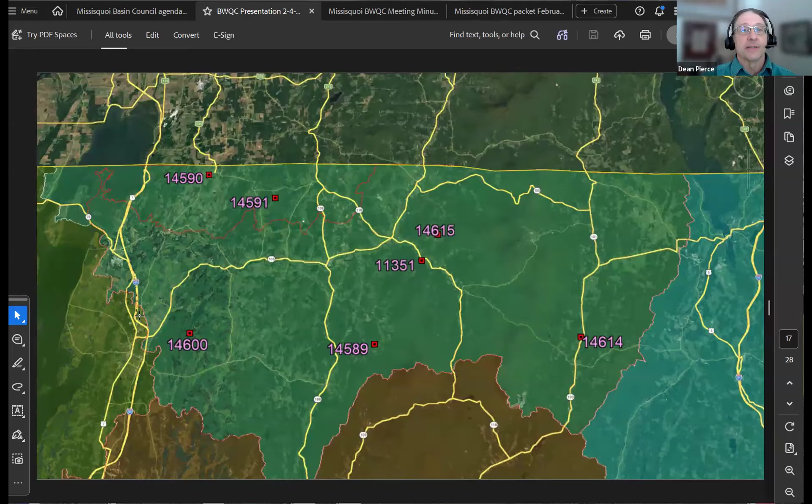You've had the packets for a week now, so you've hopefully had a chance to get some idea of what the projects are. They're in a distribution of towns across the watershed, 3 or more different applicants, including a first timer in the land trust.

And I wanted to just touch on the corrections, the corrected overview data, shown in this table. The numbers will be correct when we get to the individual applications, but apologies for giving you a table in a text document that had not carried over the correct numbers from the spreadsheet.

But there are a couple of implementation projects, 3 final design projects, and a preliminary design project, and then the forest roads are a design project - it's kind of a new category, so it's slightly different - with a range of phosphorus reductions from a couple kilograms to as many as about 50, which is an impressive number.

And in terms of cost effectiveness, again, a range from a pretty desirable cost estimate of about $4,400 per kilogram to about $45,000 per kilogram.

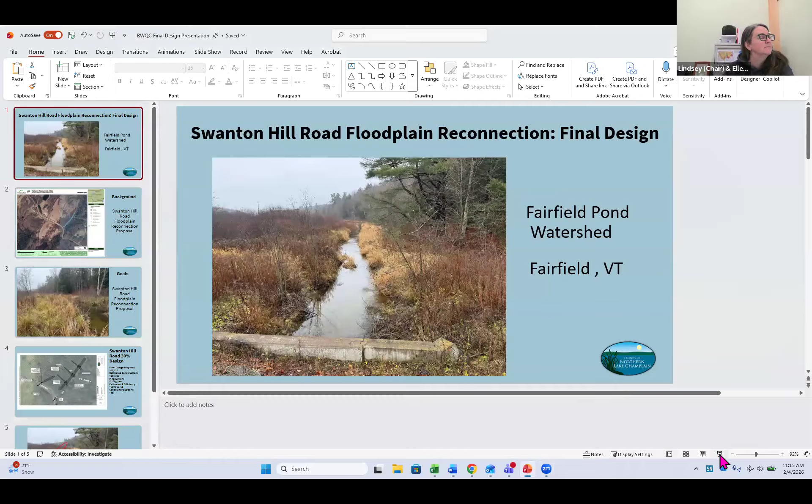So while Josh is doing that, the project name is Swanton Hill Road Floodplain Reconnection. It's a final design project. The numbers requested, as long as this is the correct table I'm looking at, it's $22,123 with an estimated P reduction of 6.18.

Thanks, Lindsay. Everybody seen this all right? Yeah, that's good. Great, cool. So this is a project that is located in the Fairfield Pond watershed, not in the town of Fairfield, but in the town of Swanton, so about just south of the lake.

Project map up here, give a little bit of background. So this project emerged out of our Fairfield Pond Lake Watershed Action Plan that was completed at the beginning of my tenure in about late 2024 or early 2025.

While the project really did give a strong suite of potential projects, that landowner outreach part for the specific 30% designs and beyond was variable, to say the least. I think I'm the 3rd or 4th project manager to have actually touched this project, and writing the final report at the end felt a little bit strange, but here we are.

I do want to highlight that we pursued some expedited project development funding from Dean. I know he'll ask me to speak on that later, but I do really want to speak to how beneficial it was to be able to develop this project a little bit more.

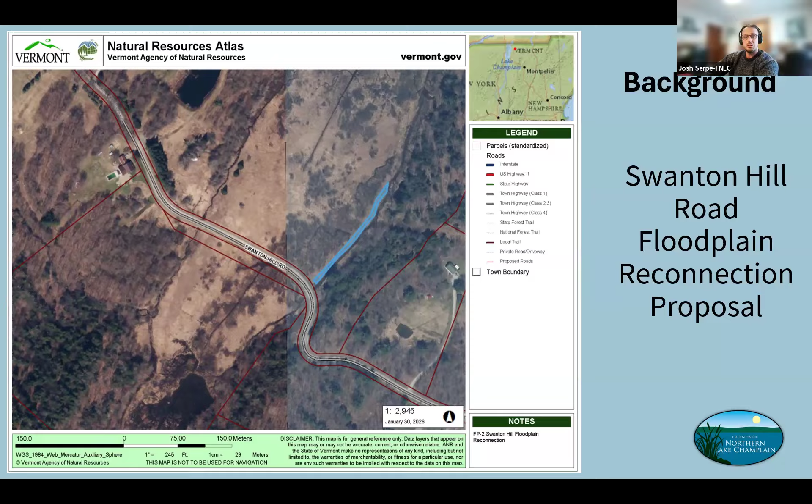Looking at this site, it was selected because it seems to be a historically straightened channel with a ditch that moves along the side. You can see on my map where I have it outlined in blue, probably an area that was formerly farmed, right off of a road on private land with a very supportive private landowner. The goals of this project were just starting to flesh out, but it's really just to take this straightened stream, remove some parts of the berm, and hopefully connect it back to its floodplain. Because of the easy access, I think it really presents an opportunity for a nice phosphorus reduction at a relatively low implementation cost.

So I'm just going to throw up the 30% design. Again, Fitzgerald Environmental was on the project for the LWAP, and we also contracted them to do some of the additional project development work. It was really fruitful to be able to bring them out on that initial site visit, meet with the landowner after they had already been on the project from 2023 to 2024.

We're proposing $22,000 for final design. Part of that is going to be for an archaeological review assessment, which I just heard back from VDHP yesterday, so that is going to be required. Looking like a phosphorus reduction of roughly 6.2 kilograms, estimated construction about $80,000. So a relatively efficient project.

I definitely want to highlight the landowner willingness in this project. It was great to be able to go to the Fairfield Pond Recreation Association and meet with the landowner. While she wasn't necessarily aware of the project, we didn't really want to dump that on her right at a meeting. She was aware of what the action plan was doing and aware that she could be a part of it. But we took a step back and also leveraged a tool being Lakewise, which she signed up for. That was another great opportunity to be able to get out there and meet with her. Not necessarily talk about the project, but sort of plant the seed of who we are, what we're doing, and what we're trying to achieve.

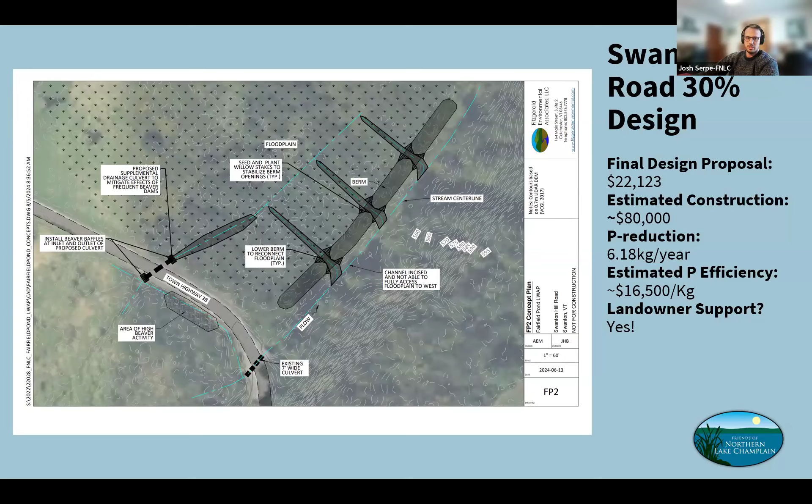It would probably trigger some wetlands permitting, but all in all, we anticipate this project having good access. We wouldn't need a permit for that part, just to really consider the cross culvert. So I'll leave it at that. Thanks, everyone.

Thanks, Josh. Anyone have questions about the project? Go ahead, Lauren.

Excuse me, I just want to flag that this seems like a great project. I just want to make sure - you kind of said you might want to do some more alternatives analysis on a couple different things, and the 22,000 just seems a little low if you also want to do alternative analysis. But if that's what Fitzgerald gave you, I trust that too.

Yeah, so I had a conversation with Joe. He said the first thing we would do is, we factored in that culvert for the design, but we would go initially and talk to the town of Swanton to see what their appetite would be for actually digging up the road.

Any other questions? If not, let's have a motion.

This is Lauren, I move to support this project with the funding amount requested for this phase. We have a motion from Lauren. Second from Ted. Okay, motion from Lauren, second from Ted.

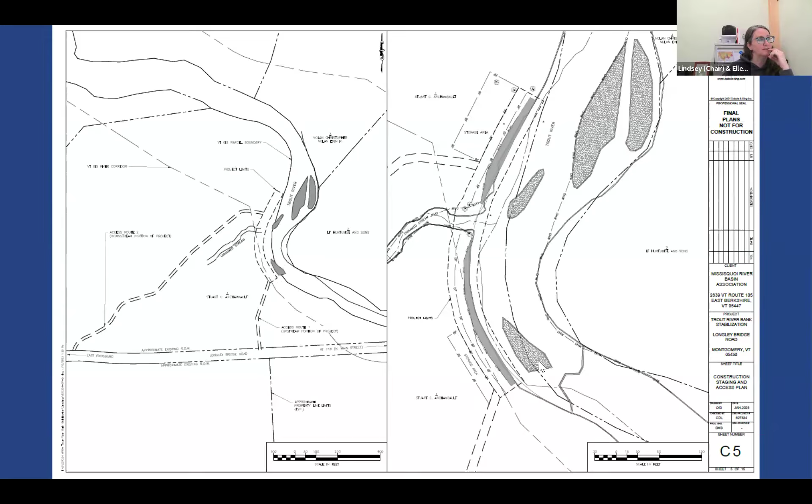That existing willow grove is reflected by this shaded area. There we go, change of perspective. This is that Willow Grove success area, and these are the design plans showing the engineered log jams and planting on top of the bank. This is the tributary we would like to expand the project into, and just really do a lot of work lowering this - it's very incised back here, so we want to really try to sink water in this area.

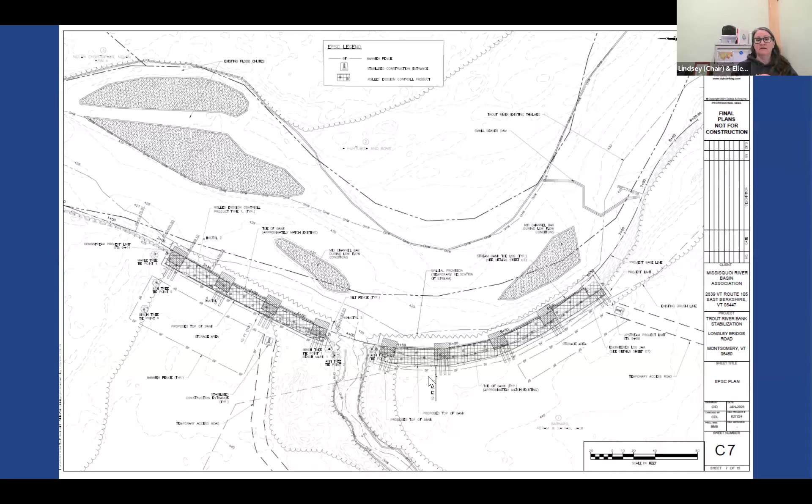And plant out the - yeah, Ellen, you want to jump in here? Feel free. Yeah, plant out the riparian zone all along here. So that's where the high phosphorus crediting comes in, because that's going to be a much higher phosphorus value than just slowing down the water with the engineered log jams. So it would be essentially combining the two projects, just getting final design for this work to happen in conjunction.

That's my last slide, just to show the area that we're looking at is right here. This is that tributary, so it is along the corridor.

Anything I missed, Ellen? The only thing I would add is that the soft stabilization part of the project is right on the edge of the river corridor. While DEC is not really energetic about doing stabilization projects, understandably, because it's on the edge of the corridor, combined with the flood plain restoration parts of the project, it would be a project they would support. I've talked with river scientist Stacy about that. So if there are any questions, we'll go from there.

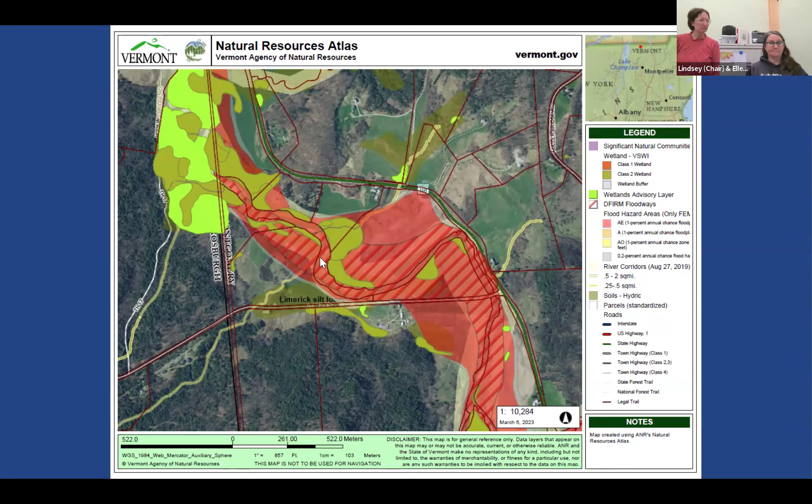Lauren: This is arguably more of a question for Dean, but thinking through that this project and Josh's are actually both final design, I just want to make sure it was communicated to project managers that final design needs to include bid phase services as well, and that everybody's budgeting for that.

I'm going to ask you to say some of what you said again, your mic is a little muffled. So you were just asking about what again? Sorry, it might be that my throat is muffled, not the mic. It's much better now. I just want to make sure that Josh and Lindsay/Ellen are including in their budget funds for both themselves

and for their contracted engineers to do bid phase services work as part of final design, not as part of implementation like it says in the CWIP policy. Thank you, Lauren.

I'll take a stab at it and say I'm not remembering off the top of my head that detail. What I would say is that we as the CWSP can act within the approval. If the approval is larger than it needs to be, it can be moved and held until later. If it's not large enough, and if you're thinking there's going to be additional expenses and the amount requested should be larger, that should be given consideration probably at this time rather than having to do it through an amendment. Is that what you're saying essentially?

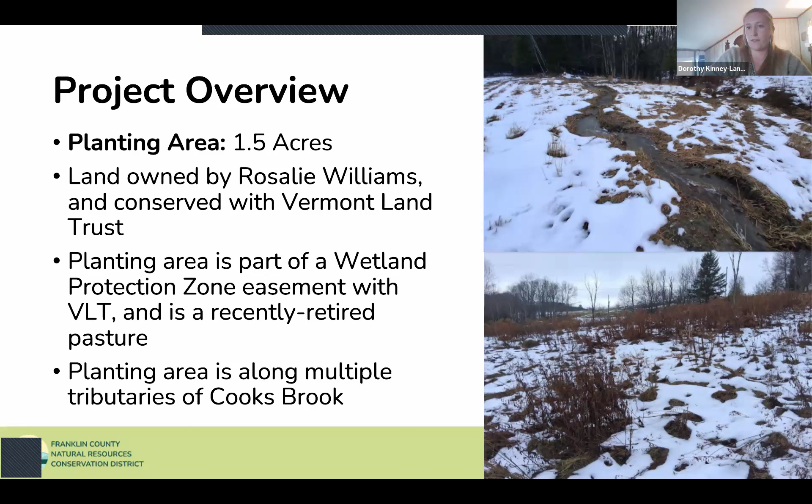Okay, can everyone see that? Yes. Great. All right, so this is the Cooks Brook tributary riparian buffer planting in Bakersfield. We're proposing a planting of a 1.5 acre riparian buffer along a couple of small streams on Rosalie Williams' property. This land is conserved with Vermont Land Trust, and the planting area is part of a wetland protection zone easement with VLT, and part of the planting area was recently retired from agricultural use.

Tucker was the one who brought this project to us. He mentioned there's a wetland protection zone easement going into place and shared a map outlining a few areas to maybe plant some trees. He wasn't sure if there might be more opportunity on the eastern section, but that ended up being pretty wet, a kind of beaver pond area. So we adjusted the planting area after doing a site visit to be this 1.5 acre zone divided into a few pieces where there's former pasture and a couple other gaps in the existing buffer.

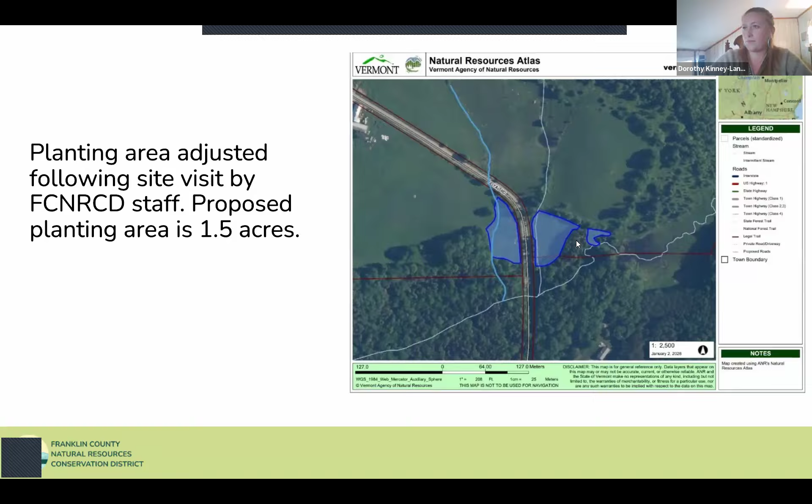The phosphorus credit for this project is 3.72 kilograms of phosphorus per year, using the interim phosphorus calculator and FFI for stability credits.

For the planting, we'll be doing 400 stems per acre, sourcing bare root trees that are 2 to 4 feet, and placing wooden stakes with each stem to help with future maintenance and survivorship counts.

The project cost is going to be around $16,494 total.

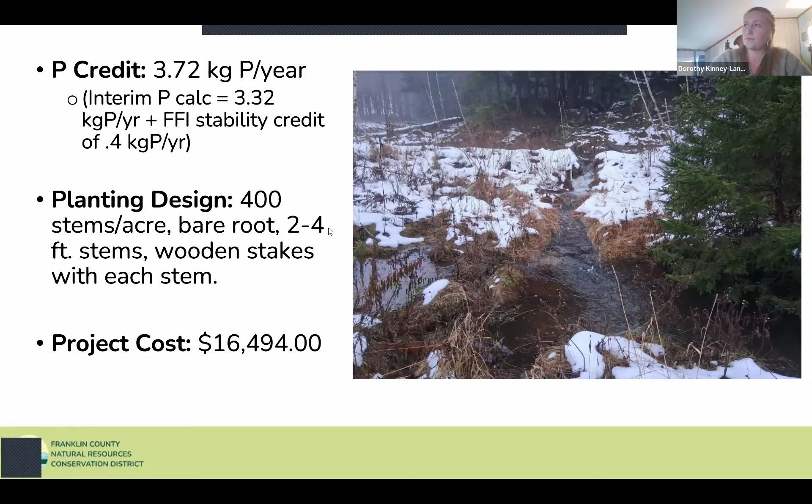The project benefits are clean water, increasing the width of the riparian buffer and adding vegetation between adjacent ag lands and surface waters, ecosystem services and climate resiliency, and enhancing that riparian habitat, and recreation and community. The landowner, Rosalie Williams, is very enthusiastic about this project and involved with Vermont Land Trust and Cold Hollow to Canada. We'd like to highlight this project and all these collaborations with other project partners.

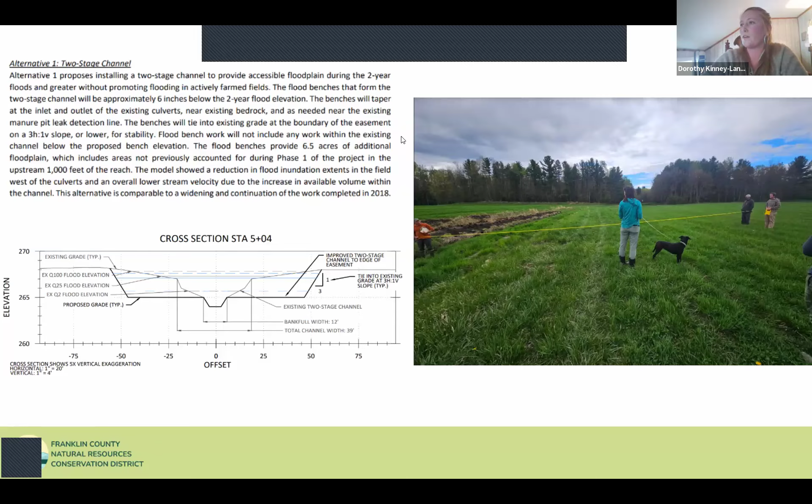The phosphorus credit for this project is 31.3 kilograms per year. This does not include credits associated with tree planting, as that work is being completed through CREP. That was something I had asked Dean about a while ago - should we include this? Because there's also tree planting happening, but that's under a separate funding source and project.

The budget for the implementation phase is $456,348, bringing the total project cost to $543,770, with an estimated P-cost efficiency of $17,371 per kilogram of phosphorus.

As I mentioned, this project is in its final design phase, and that goes through June. That includes bid phase services with the engineer, Fitzgerald Environmental, to create bid documents for implementation contractors.

We will also be completing the phase 1 archaeological investigation this spring, as soon as field conditions permit, and wrap up with securing permits and developing the site access easement and O&M plan.

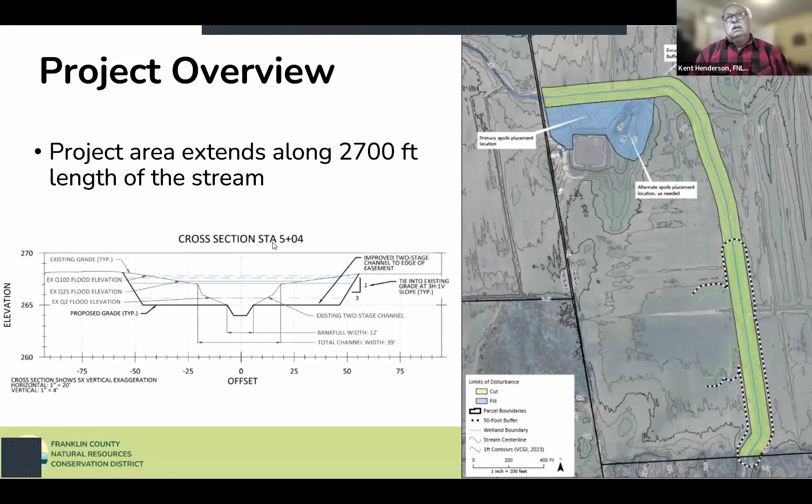I almost added a little graphic, maybe I'll do it now, of where the trees are gonna go. So there's the existing elevation up here where the field is, and then it cuts down. Yep, and the trees will go on this. Okay, that's the part I called the shoulder. The shoulder, so we're talking the same language now, right? Okay, I get it, okay.

And that was submerged a lot of the time. I was amazed how long that would stay submerged, and it does a really good job of collecting sediment. We tried to figure out ways to actually measure it, and every time we put something in the shoulders, we lost it - it either got buried and we couldn't find it, or it got washed down. But the phosphorus measurements we took at the inlet and outlet were highly encouraging. So it's a very, very effective structure to put in.

This will be a good experiment to see what you can plant in those shoulders, because what I did see was just a lot of invasives would go in there, and the mallards loved it. Every time I walked down through there, I scared up a bunch of mallards. So it's a very good structure.

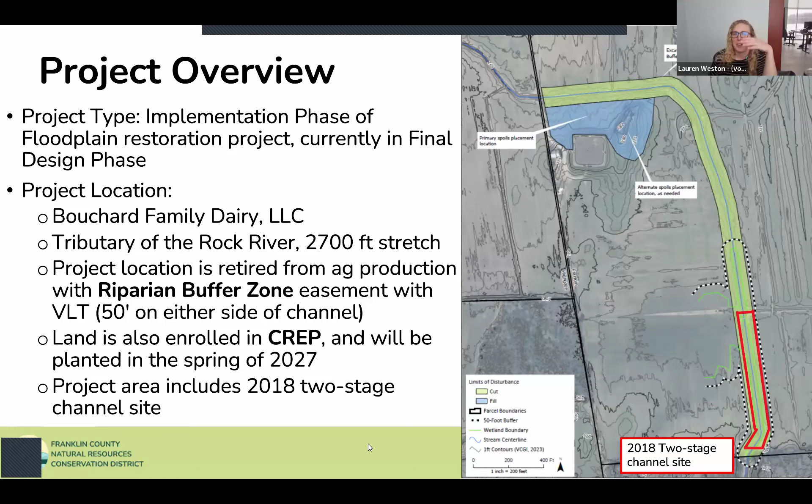Okay, sorry, Dean, do you mind sharing your screen just so we know we're answering your question? Because I think I'm not looking at the same thing you're looking at, and I want to give you an answer. And I'll also note that Alaire has joined us. Okay, hey buddy.

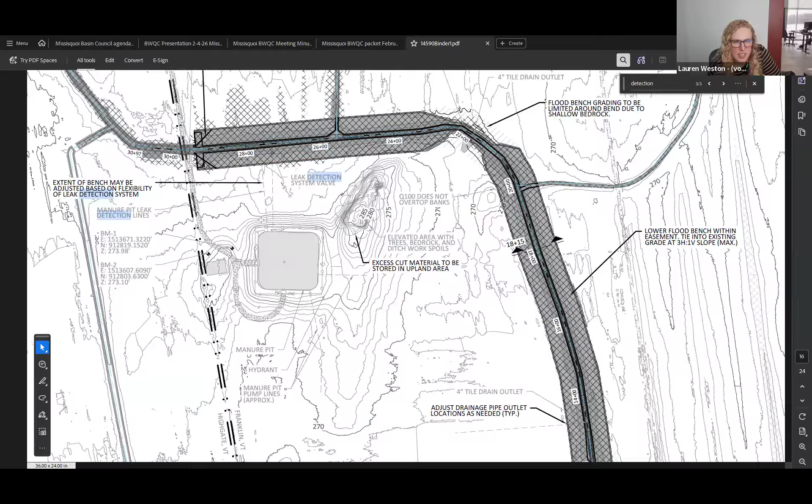So I'm looking at this area here. Can people see a plan? Okay, so manure pit, extent of bench may be adjusted, manure pit leak detection lines, plural. I wasn't sure that maybe there are two, and that's what the dashed lines represent, in which case I was thinking it's kind of like an easement. You'd be looking at an area on either side of the line, but if it's only one and within those, then that represents a zone that could potentially be affected. That's what gave rise to the question. Hopefully that helps.

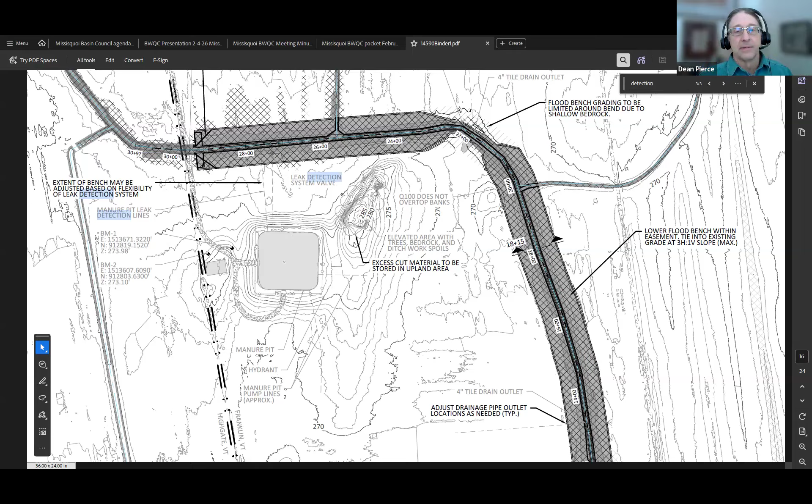I might be speaking out of hand here, so Dorothy, feel free to tell me I'm wrong. But I think if during excavation we find that those lines are problematic and can't easily be shortened or readjusted, what the plans are arguing is that the cut of the floodplain might be tapered towards that culvert so they're not interfering with the manure pit system. But we can get you more details.

Any more questions or discussion about this project? Kent? Yeah, I want to go back to those shoulders and planting in those shoulders. I just know that they're going to be in standing water for quite a period of time. I'm really concerned about the survivability of trees or shrubs planted on that area. I'd like to have a little more assurance that something that's planted, trees or shrubs, is going to survive on those shoulders. Is there evidence? It's not like Vermont invented this structure. There's several that have been built in the Midwest. Has that been researched to know that you can actually have a successful riparian planting on that structure?

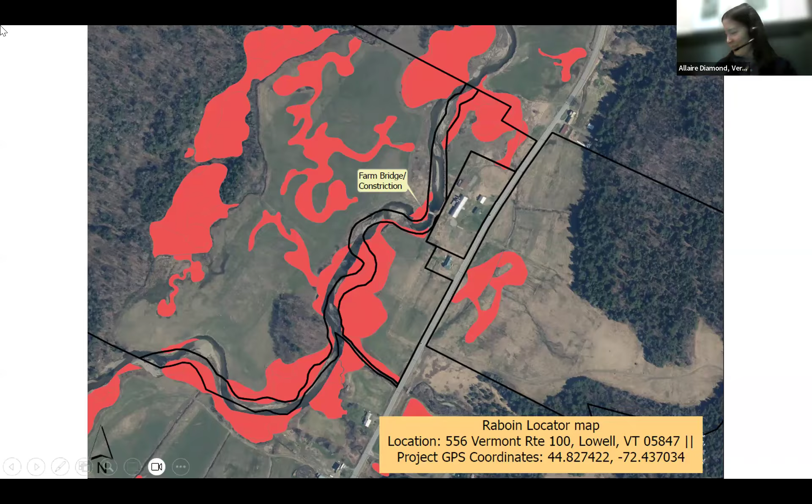Excited to see this move forward.

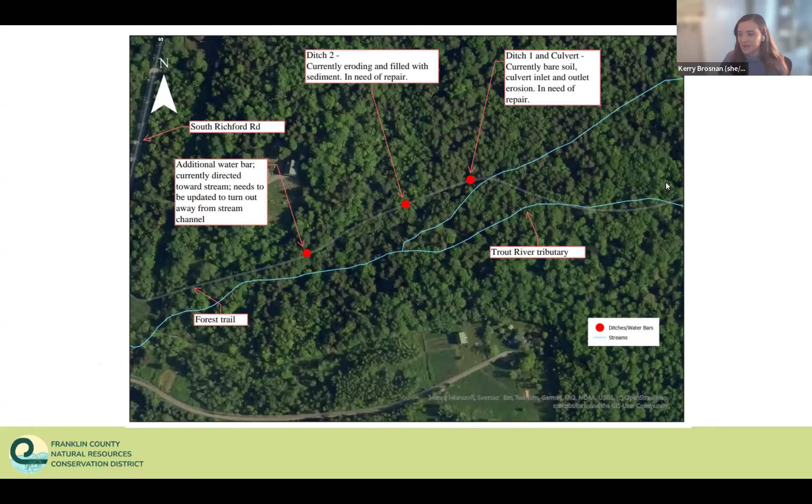So the final design budget will be around $21,146. For the total project cost of this final design and implementation, we're estimating around $50,000. And the estimated P credit is 3.78 kilograms per year, giving us a cost effectiveness of about $13,000 per kilogram per year.

Some other project benefits include improving the water quality in the headwaters of the Missisquoi River, improving climate resiliency and ecosystem services. Improvements to the skid trail will allow for less harsh impacts to the waterways after large flooding events, and will improve in-stream habitat with less sediment entering the stream. This project will also improve a public recreational space. This trail is incorporated in a vast trail network, but I do want to note, though this trail is used recreationally, it is a skid trail that the landowners would like to use in the future to take out wood, potentially.

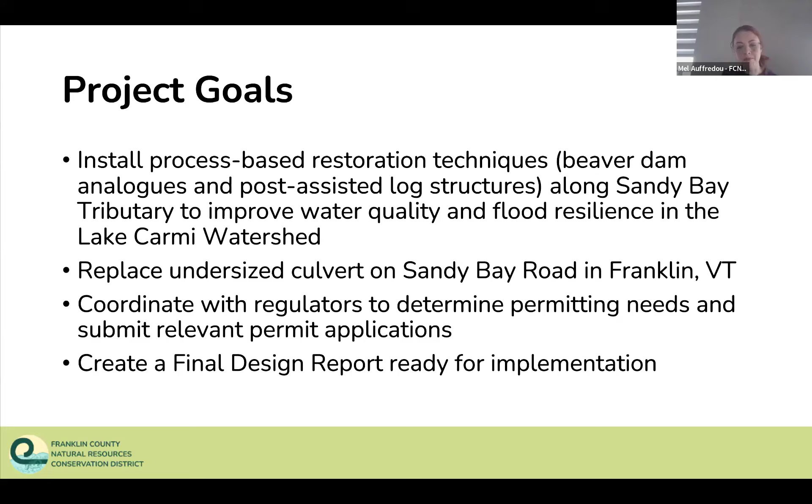Great, okay. So this is the Sandy Bay Stream Restoration final design application, following up from a preliminary design that was funded by the CWSP. This is located in Franklin, Vermont, in the Lake Carmi watershed. The goal is to install process-based restoration techniques, including beaver dam analogs and post-assisted log structures along Sandy Bay tributary, on the western side of Lake Carmi, to improve water quality and flood resilience. As part of preliminary design, we identified an undersized culvert on the upstream side of this parcel that we are also including now, that culvert replacement to expand it to bank full width. We need to coordinate with regulators to determine permitting needs, submit relevant permit applications, and create a final design report so that it's ready for implementation.

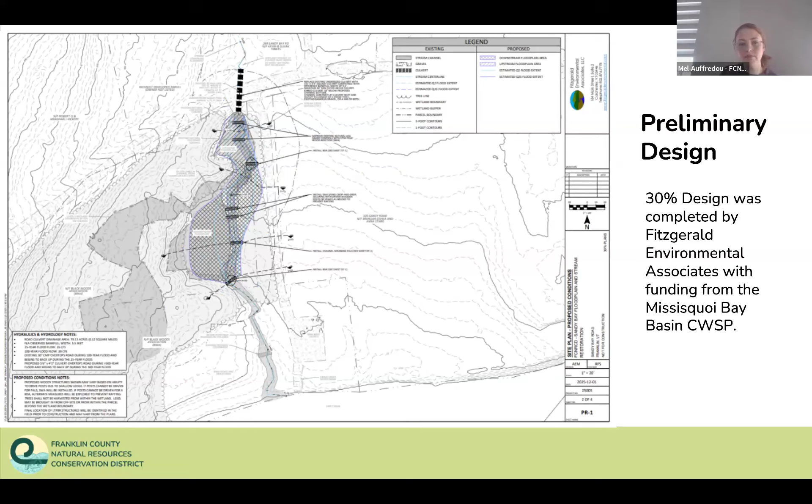So the budget for final design is about $26,500. The total project cost is $100,000, but I want to point out that includes about $5,000 of volunteer match, because this is a common lot owned by the Blackwoods Association, a great group of landowners on Blackwoods Road, many of whom have lakeshore parcels on Lake Carmi, and they're very interested in this project. The benefit of this project is it would really involve the community there and help folks learn about stream restoration, so they want to be included in creating those beaver dam analogs and PALs.

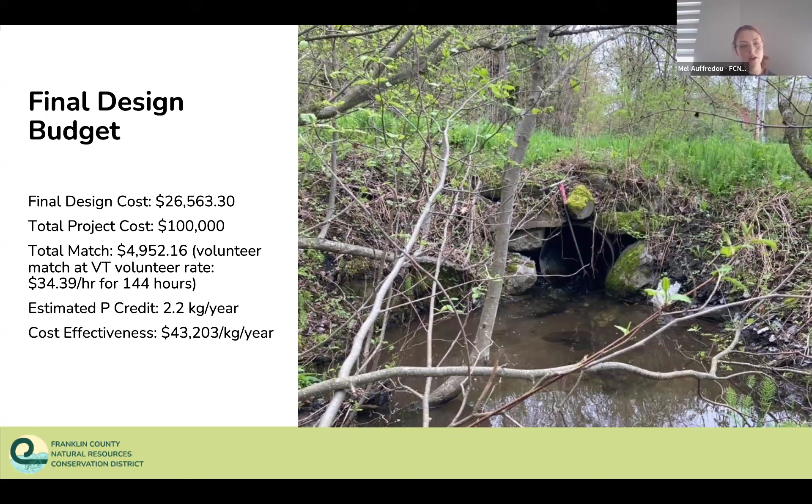The estimated phosphorus credit is 2.2 kilograms per year, including the culvert replacement. The cost effectiveness number I have here is with the $4,900 taken out of the $100,000, so it's closer to $95,000, and that comes to 43,000. But if you don't have the volunteer match, it would be closer to 45,000. I just wanted to make that a bit more clear.

Some more benefits of this project: we would improve clean water in the phosphorus-impaired Lake Carmi watershed, improve flood resilience and ecosystem services, and improve aquatic habitat through the addition of woody materials to the stream channel. And like I mentioned, there's that community education aspect, with lots of folks wanting to get involved and participate in the implementation to learn about water quality and stream health. And that's all I have.

Questions or discussion?

Question, Dean, can you remind us what the threshold is for those phosphorus projects? Yeah, and I was going to ask a question having to do with cost effectiveness as well. So the thresholds are 30,000 for non-stormwater projects. Mel and I have gone back a little bit, not recently, but we've been talking about the cost effectiveness, but it's 30,000. There are exceptions, and anyway, that's the answer to your question.